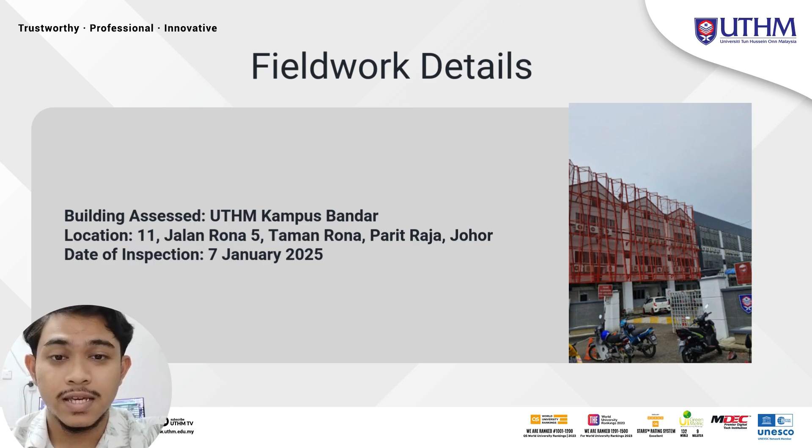The building that we assess is at Kampus Bandar UTHM, located at 11 Jalan Rona 5, Taman Rona, Parit Raja, Johor, and the date of inspection we did is 7th of January 2025.

I want to give a slight building overview. Firstly, the campus is located in Parit Raja, Johor. It also supports education, research, and administration, and includes academic blocks, administrative offices, and student facilities.

The purpose of this assessment is to evaluate current conditions, because we know this building is above 20 years old. We want to identify the critical defects in the building and propose a maintenance plan.

The building history: this campus opened in 2004, and in 2006 it was upgraded to Universiti Tun Hussein Onn Malaysia, located near Campus Bandar. In 2007 groundbreaking began for a new library building in UTHM Induk, and in 2008 the library moved to a new 16,000 square meter premises, accommodating 300,000 books and 3,000 users.

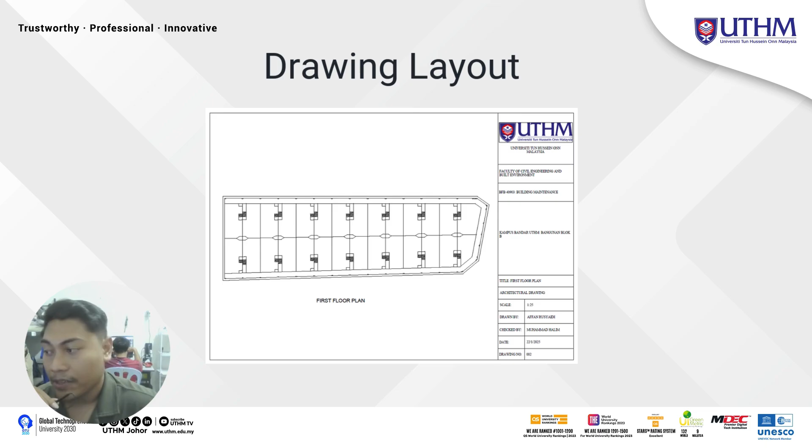As shown before, the ground floor plan till the second floor plan actually has the same layout, copying from the ground floor plan itself. So the drawing of the layout is drawn following the originality of the building itself.

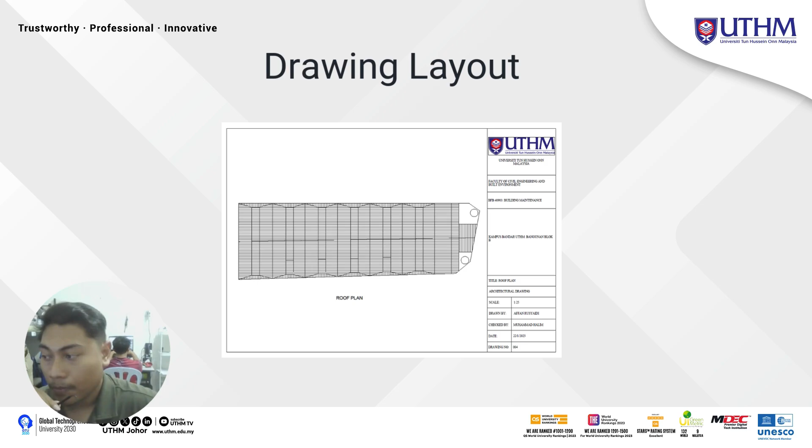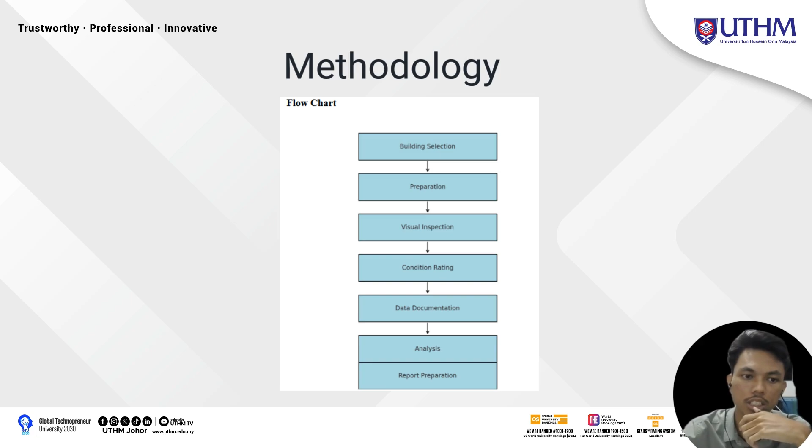As shown here, this is a flow chart for the process of the whole project. First we start with building selection, then preparation of tools and documents needed for the project, then visual inspection, then condition rating, then data documentation, and last is the analysis and report preparation.

Next we have the building condition assessment, which is divided into 5 parts. Number one is building physical ratings, and number two is maintenance priority ratings. For number three, we have the matrix analysis and maintenance action.

Here we have the severity of the condition rating. Number four, we have the building rating maintenance action, which is rated from 1 to 5, from very good to very critical. Last but not least, number 5, we have the data collection method using a datasheet to evaluate each of the defects in the building.

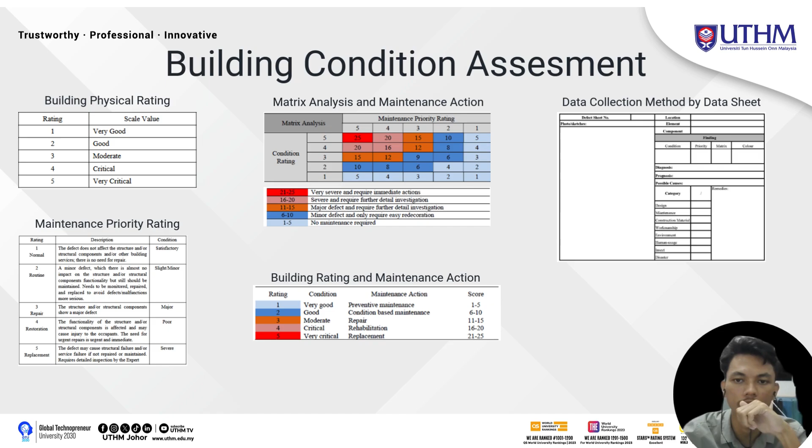Assalamualaikum. My name is Nur Fazira Akila. Today I will present about our project. My part is to present the analysis. The objective of analysis is to evaluate the observed defects, assess their potential impacts, and determine their underlying causes. For this analysis part, I will show you several defects or issues at the building.

The first one happened at the ground floor, in the Student Centre location, and the component is the wall. The diagnosis is that external water may be entering through cracks or ineffective waterproofing, especially if the wall is external or near a wet area. The wall's appearance and structure can be restored with appropriate repairs like patching, repainting, or waterproofing. The possible causes are that the area has poor ventilation or temperature differences, causing condensation to form on colder surfaces, leading to prolonged dampness over time.

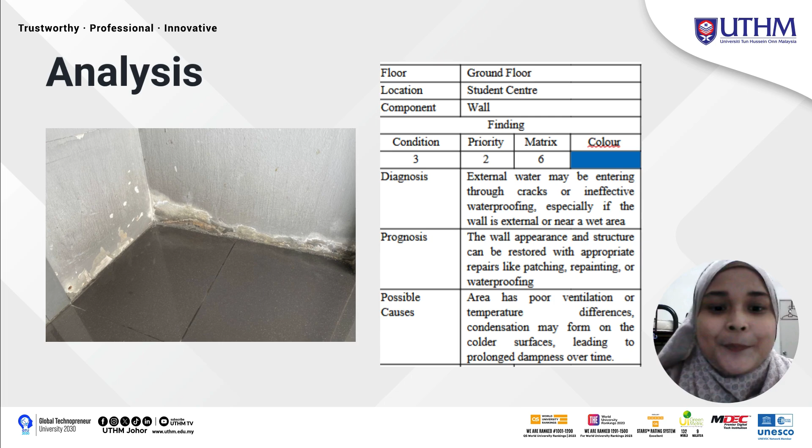For the second analysis, also at the ground floor, but the location is the staircase between ground floor and first floor. The diagnosis is trapped moisture in the wall due to poor ventilation or improper drying before painting. The prognosis is mold or mildew growth, posing health and aesthetic problems. The possible causes are lack of a primer coat or using a low quality primer that fails to bond the paint to the wall.

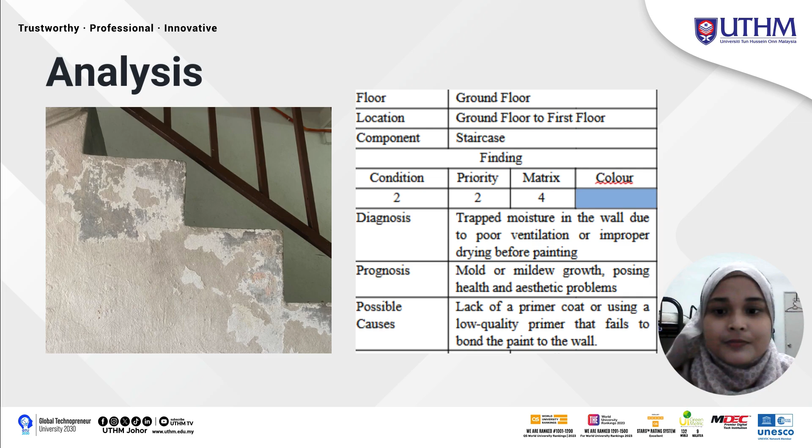Okay, for the third, also at the ground floor, but the location is ground floor to the first floor, and the component is the staircase flight. The diagnosis: the material seems to show signs of wear and tear, possibly due to heavy use or exposure to environmental factors.

The visible damage could be spalling, where surface material flakes or chips off, exposing the underlying layers. Next, the prognosis: the damage may worsen over time, leading to deeper structural issues. Moisture can further penetrate the material, causing more cracks and degradation. The possible causes: high foot traffic or heavy load over time can cause abrasion and surface degradation.

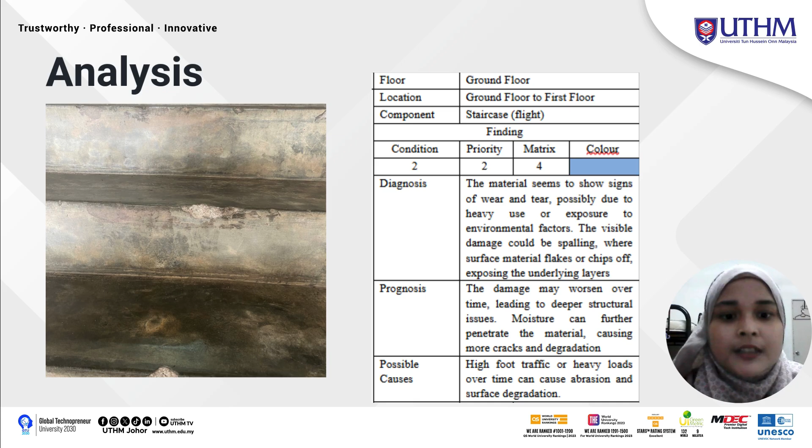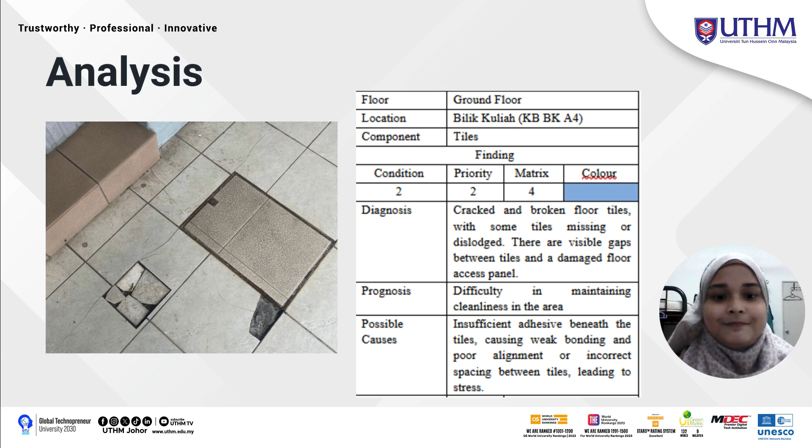Okay, the last part of analysis is to calculate the total score. The total score we get is calculated by multiplying the physical condition rating with the maintenance priority rating, and we get the matrix analysis. The total of the matrix analysis for the building is 45, and after we divide it by the total number of defects, we get the number 6. So the condition of the building is good.

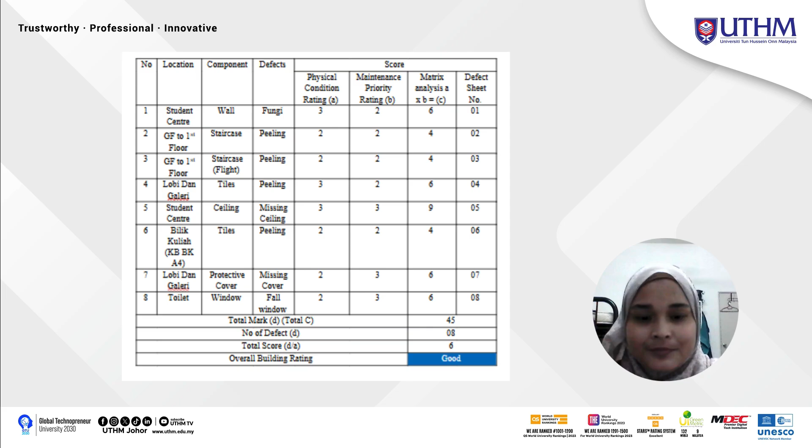For CMMS implementation, we have 6 subchapters. First is work order, which we divide into wall, staircase, ceiling, fungus on wall, and tiles. Second is priority, divided into 3: low, medium, and high. Work type is divided into 3: reactive, preventive, and others. Next is categories; we have 7 categories, which are damage, inspection, mechanical, preventive, safety, standard operation procedure, and project.

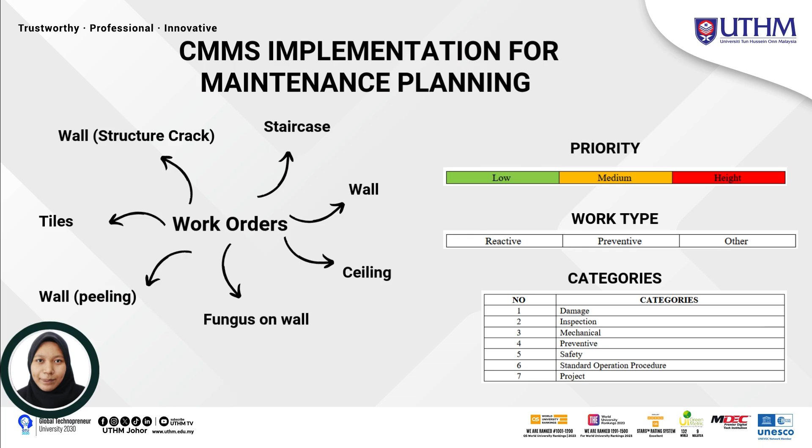So for the work planning and scheduling, the CMMS software that we use is Project Manager software. In here we have eight descriptions, which are wall one, staircase one, staircase two, tiles one, ceiling, and tiles two, electric wire, and also window.

As you can see here, the priority only has two types, which is low and medium, so there is no high priority in this work planning. For the categories, we only have inspection, preventive, safety, and damage.

So here we have the last maintenance date, which is mostly around 2004. So we conclude that the next maintenance date should be done in 2025, so that we can prevent the description that stated here. So that's all from me.

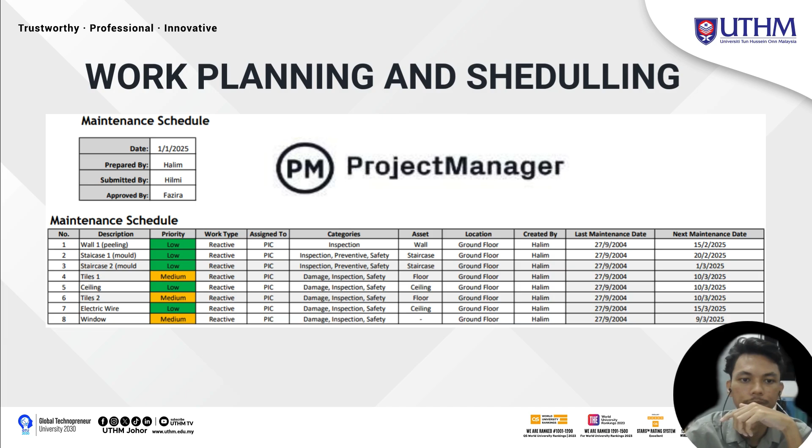Next slide is maintenance budget. From the previous chapter's analysis and recommendation, we can see this overall building rating is in good condition. From this building, we can summarize all these defects and damage, which are: fungus on wall, peeling paint and wall damage, damaged stair surface, exposed electrical wire, crack in the wall, tile crack, paint peeling, chipping or flaking of a surface, ceiling missing, leak, damp effect on floor, tiles peeling, and mold growing on the corner of a concrete wall.

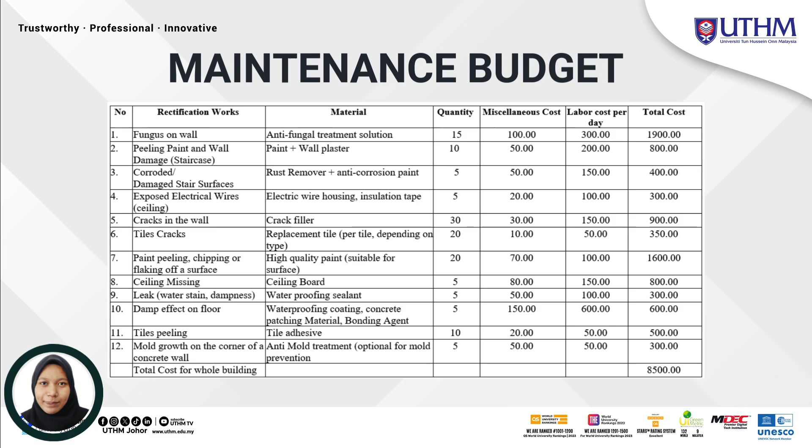So the total cost for whole building maintenance is 8,500. The defects are minor and the building is in good condition overall. The total repair costs are quite reasonable given the low number of issues.

All right, so we have arrived at the very last part of the presentation, which is the conclusion. In here, we will conclude everything that we have told you. I believe my group members have told you briefly in terms of the building overview, the issues that this building faces, and the maintenance action required for the buildings to take, and the implementation of the CMMS software.

For the building overview, I can summarize that it is located at Parit Raja, Johor. The purpose of this building is to support the education and research of UTHM students, especially for architectural students. So there are some building issues in these buildings, like wall cracks, peeling paint, broken tiles, exposed wiring, etc.

So from all of the problems that I have listed above, it requires some maintenance action in order to prevent or reduce the problem from occurring in the future. Maybe the builder can somehow preserve the building value.